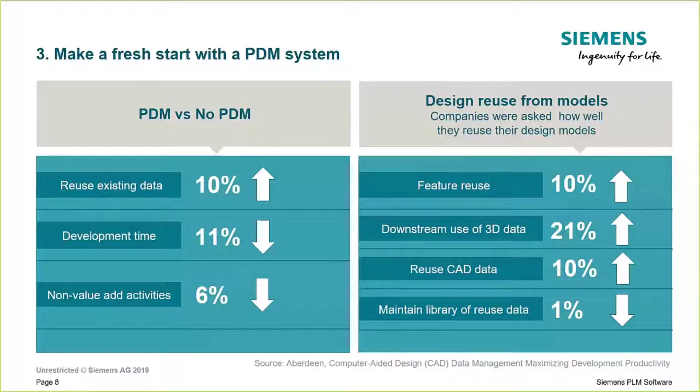Let's take a look at what we mean by right size PDM. For starters, you can deploy it quickly for quick payback with limited to no IT experience. You need to consider the software's capabilities. Are they right for you?

A full-featured PDM system can support your whole business from product development to delivery, with the flexibility to fit your people and processes. As your business grows, right-size PDM can grow with you. Scalability is key, so you can add more people, locations, or collaborate more closely with customers or suppliers. Right-size PDM is the choice for business excellence, today and in the future.

Now let's take a closer look at our solution, Teamcenter Rapid Start, which is right-size PDM to get you started quickly and cost-effectively today, then grow with you as your needs grow tomorrow.

The secrets to streamline product development with Teamcenter Rapid Start begin with a look at the PDM's capabilities. But the best-kept secret is our fast time to value. We'll show you how you can get into production with Teamcenter Rapid Start in 1 week for a fast return on investment and payback in less than 6 months.

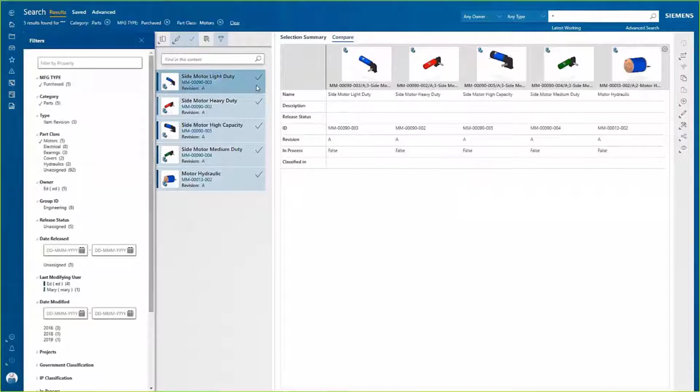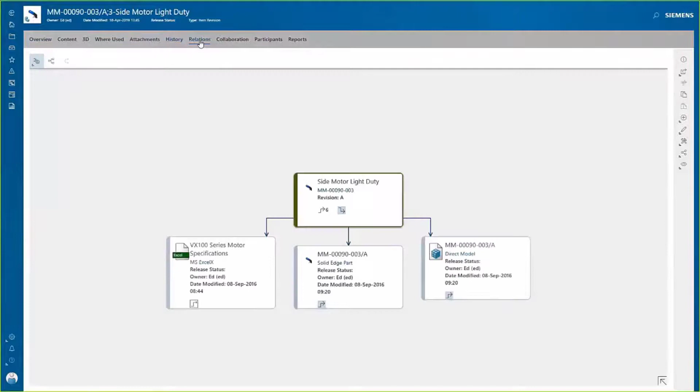Once you find the data you're interested in, everything else is also found for you. You don't need to try and find the related data and hope you get it right. For example, using the JT file format allows anyone to view and analyze the part or assembly regardless of the CAD system it was designed in. You can also easily view the related attachments to the part. If you need to see other related data, it's just a click away.

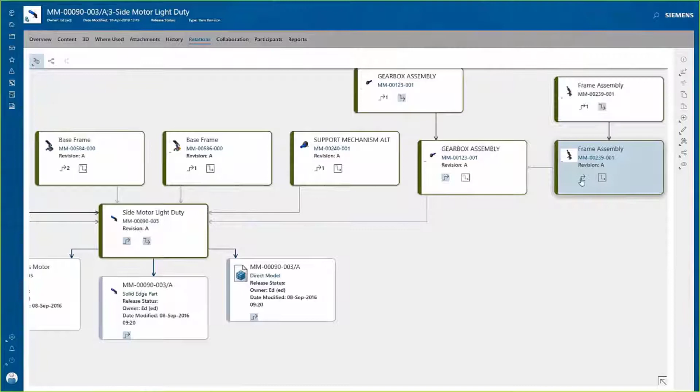You can graphically view how data is related to one another in an easy-to-use layout. What about the bill of materials this component is used in? Once again, it's just a click away. You can then open the bill of material for further exploration.

The bill of material is easily explored using a familiar tree layout. Selecting any component lets you see info about that component. Since Teamcenter manages all the revisions, you can be assured you have the info you are looking for.

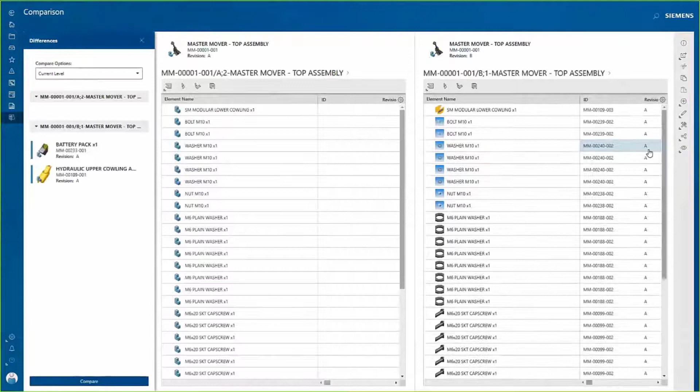You can also access the history of the component, as maybe you want to compare the current revision with the previous revision to better understand what changed. Teamcenter has it all right there for you. The comparison displays the bill of materials side by side and highlights the differences.

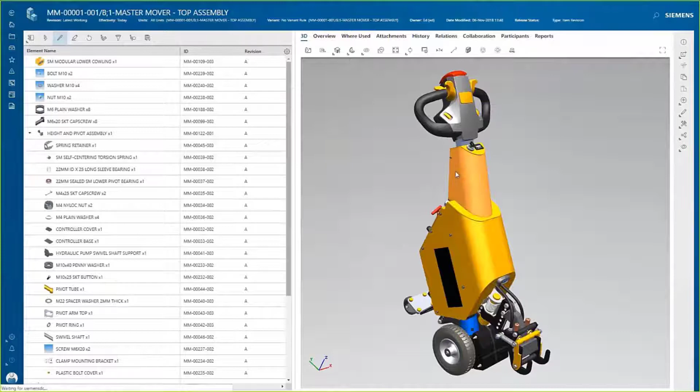You can use visualization capabilities of Teamcenter to graphically interact with the product. You don't even need access to the CAD system they were designed in. They may have also been designed in multiple CAD systems. The Teamcenter visualization capabilities allow you to visualize all the data in common JT format. You can take measurements or sections to further analyze the makeup of the parts in the assembly.

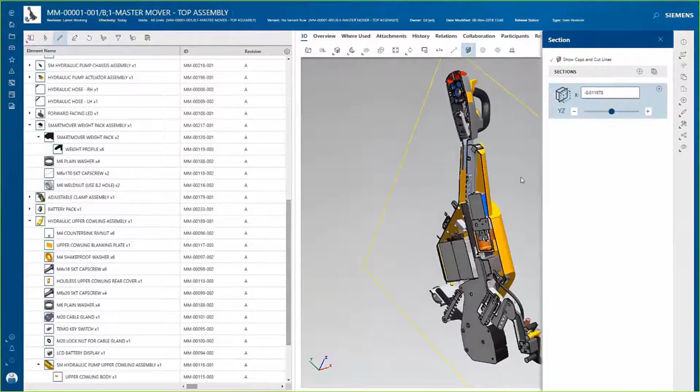One of the most important aspects of your product development process is managing change. Teamcenter gives you the tools you need to capture and document your change, and it gives the people involved in the change all the insight they need to understand the reason for the change and what data is changing, allowing them to make an informed decision about that change. They have visibility to the entire workflow, who's participating, what's been completed, and items impacted or introduced by the change.

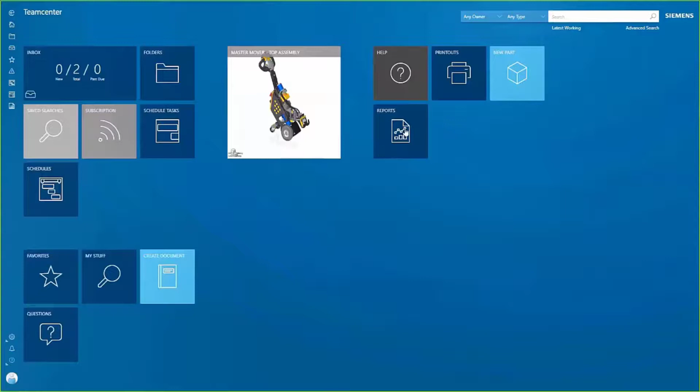Finally, reporting gives you real-time insight into your parts, assemblies, changes, and other important data to help you make better decisions. This and other reports available to you in Teamcenter allow you to quickly act and react to your business needs across your company.

So here's an example where our customer Sparkonix benefited from improved search capabilities offered via Teamcenter Rapid Start. Designers can now concentrate on design rather than on storing, searching for, and retrieving data. We have reduced our design time by 25%.

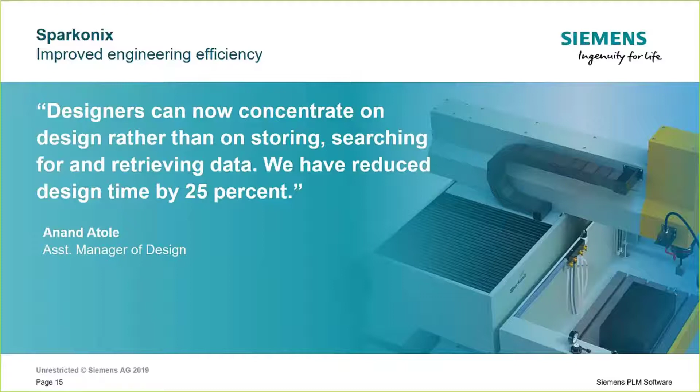You've seen how easy it is to use the powerful search capabilities of Teamcenter Rapid Start. Now let's talk about how easy it is to access PDM inside your CAD and Office tools that you use every day. By putting PDM at your fingertips, you will see an increase in worker productivity.

Teamcenter Rapid Start uses the standard Teamcenter integration for NX, which provides access to a full range of PDM capabilities. Users can easily access PDM functions such as search and reuse, structured workflows, change management processes, design relationships, and more from within the native CAD authoring environment.

To help maximize designer productivity, the integration enables designers to create, save, search, and edit objects, including drawings, parts, and assemblies. Users can selectively update in-session models to later versions or revisions without reloading their entire assembly.

During the design process, the Teamcenter environment tracks and manages the creation of new product revisions or version updates for work in progress. As a result, designers spend less time finding the correct revisions of NX data.

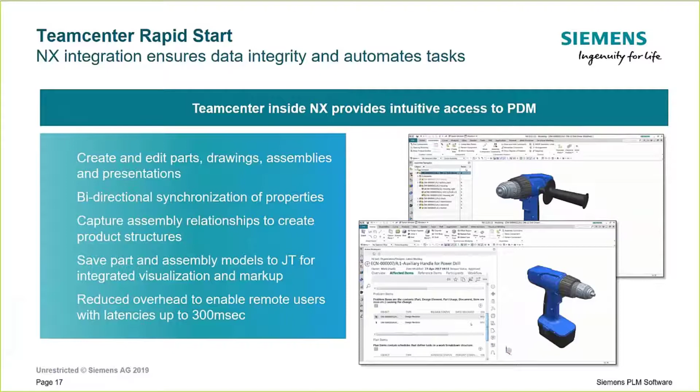Now I'll show you a video so you can see some of this functionality in action.

Teamcenter integration for NX brings PDM right inside the NX user interface. Teamcenter manages your files, revisions, and security of your data so you never worry about things like opening an assembly and having components not load.

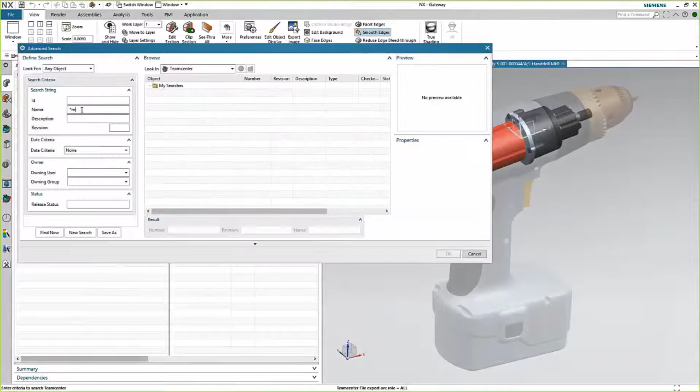Finding data is also easy with Teamcenter's powerful search tools. You get instantaneous results when searching for data. And with Teamcenter, you can be assured you will always get the proper revision you are looking for, which aids in reducing errors and rework.

You also have easy access to the Teamcenter information. Here you can view additional PDM data like properties, where the data is used, workflow, change management information, documents, and so much more just a click away.

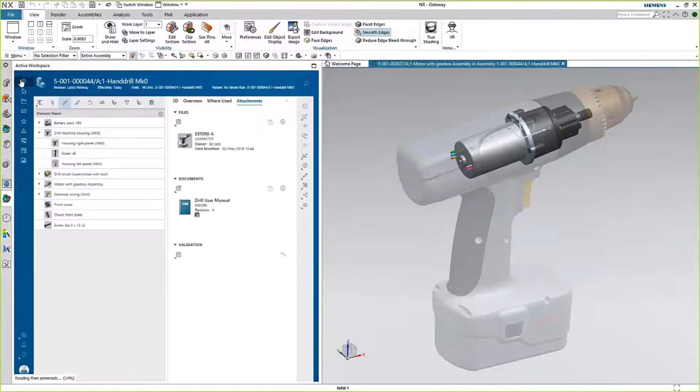You also have full visualization capabilities, which is useful when trying to find components to add to your assembly. You can see what they look like before opening them in NX. If you already have the data open, selecting the data in Teamcenter will also highlight inside NX.

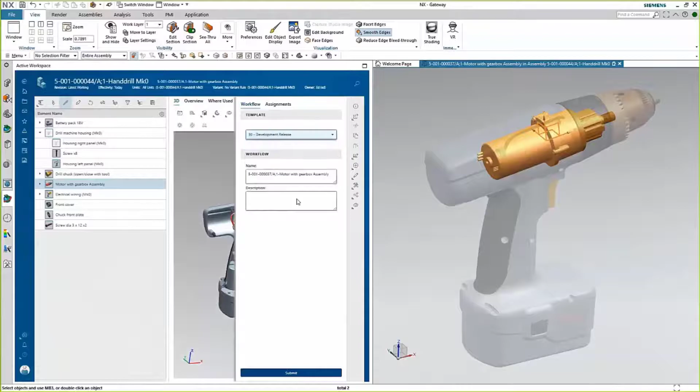Finally, when you're ready to send your data to review to get it released, it's just a click away. As you can see, using Teamcenter Rapid Start with the NX integration gives you everything you need to design and manage your CAD data right inside NX.

Next, I'll show you how Teamcenter Rapid Start works with NX to manage change. Because all the product-related data is interconnected in the PDM system, when change occurs, we can understand the effects of the change upstream and downstream.

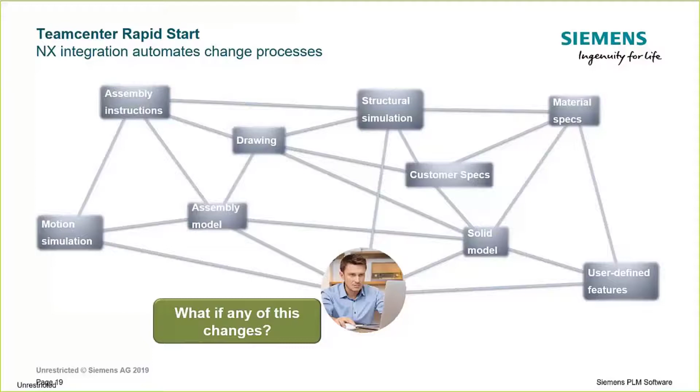Even a small change in a part could potentially affect additional areas, such as quality documents, analysis, or machine code. We have to know this interconnected structure and be able to find the affected documents.

Being able to access and communicate the correct change information across your entire company helps you respond to and resolve the change faster, and just as important, accurately, the first time.

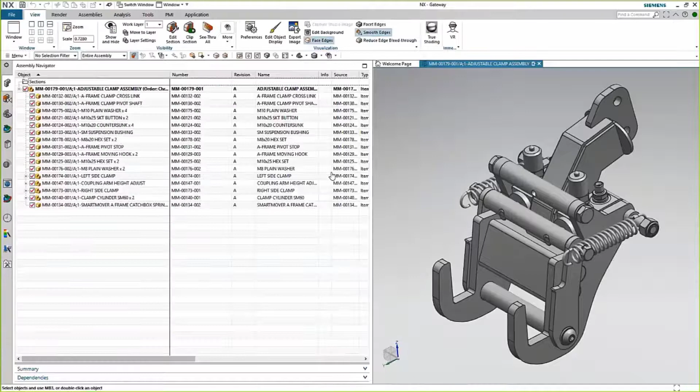With Teamcenter, the change and the data affected by the change are directly related to one another. So right from the change, you can open the data inside NX and begin working.

In this example, you've been assigned to a change where you need to add additional material to a component. Teamcenter handles all the file and revision management so you can focus on the design. You're able to easily create a new revision, update the model, and save the data to Teamcenter.

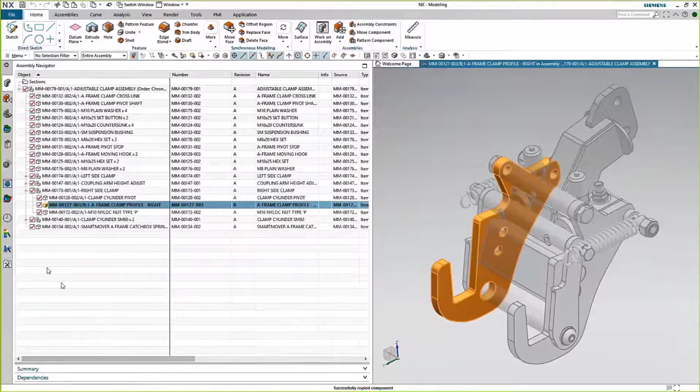Once you've made the necessary updates, letting people who will be reviewing the change know what has actually changed is easy. Right from in NX, you can attach the data to the change. Now all that is left is for you to sign off on your task and send it for review.

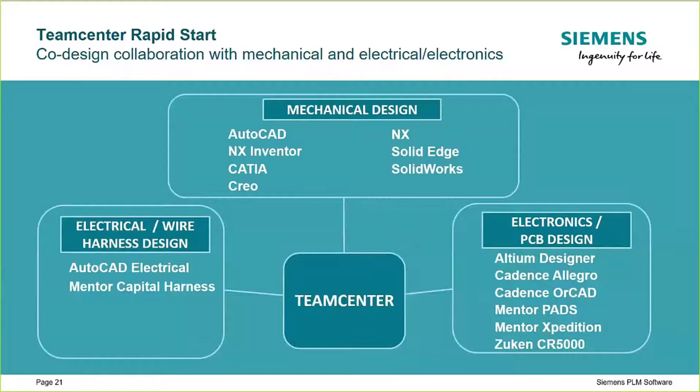In addition to NX, Teamcenter Rapid Start is tightly integrated with all the major mechanical and electrical CAD tools. With Teamcenter inside the design environment, users can be comfortable in the system in which they are accustomed and still get the benefits that we have been discussing.

For non-CAD users across your business, Teamcenter can be accessed from any web browser or any smart device. For Microsoft Office users, there is a Teamcenter toolbar right inside of all the Office applications that is extremely intuitive with commands like open, save, submit to workflow, and other operations.

You can just open Word or Excel as you normally do, and then you can save to the secure Teamcenter encrypted volume instead of saving to a network or local drive. This immediately puts your documentation into the managed environment where you can take advantage of review workflows or other benefits of Teamcenter.

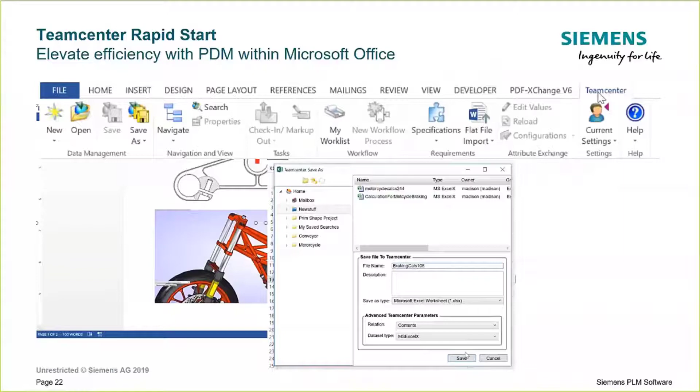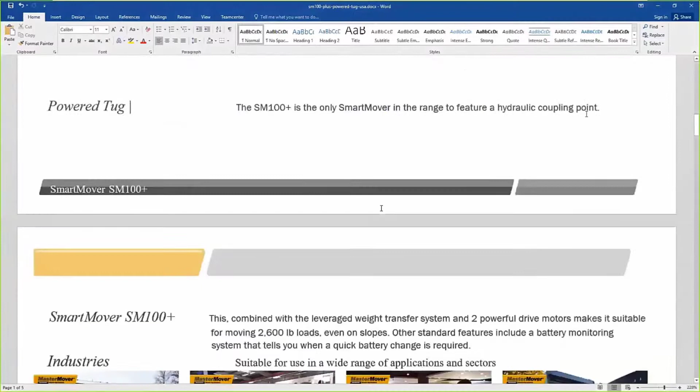The Teamcenter client for Microsoft Office brings PDM right inside the Microsoft tools you use daily, allowing you to leverage the PDM security, templates, attribute synchronization, workflow, and much more without having to leave the Microsoft Office interface you are already familiar with. In this example, you need to open a document to make a change and then submit it for review.

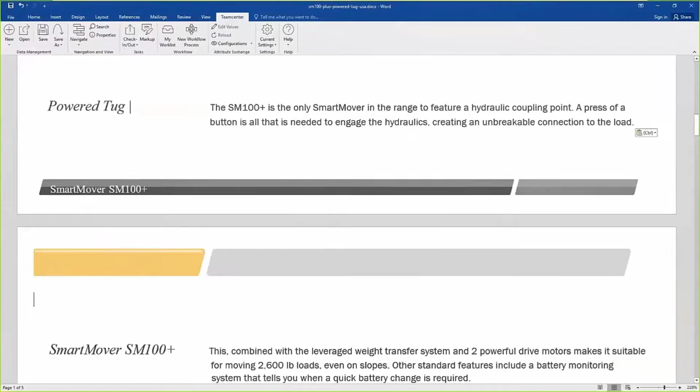Using Teamcenter, you can find and check out the document. You then update the contents as needed. When you have completed the updates, you save it back into Teamcenter, knowing it will manage the data and security for you.

So now that you've seen the many ways people can access Teamcenter from a web browser, inside CAD, or Office applications, let's take a look at Konecranes, a customer that has successfully integrated mechanical and electrical design in Teamcenter.

In addition to NX, we have Autodesk Inventor, we have SolidWorks, and from the 2D side, we have AutoCAD, and the data is used throughout the different locations, so we have integrated all the mechanical CAD solutions to Teamcenter. On the electrical CAD side, we are focused on Zuken.

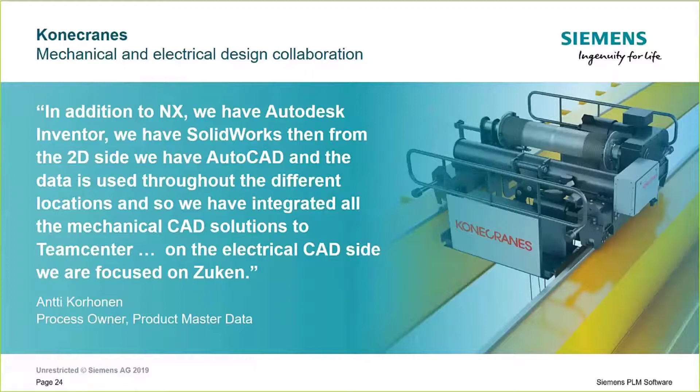In this last section, I'll talk about getting up and running in one week and getting your return on your investment quickly.

With Teamcenter Rapid Start, we offer a pre-configured deployment of Teamcenter. By doing this, we can deploy much quicker than a standard deployment, which allows you to begin using Teamcenter quicker and reap the benefits. This gets you to that return on investment sooner.

The implementation is a small business installation of Teamcenter Rapid Start, which is just one of the delivery options. There are other on-site and cloud-based options that change the formula and rebalance the upfront versus reoccurring cost, but the bottom line is that we can deliver PDM to fit your needs quickly and cost-effectively.